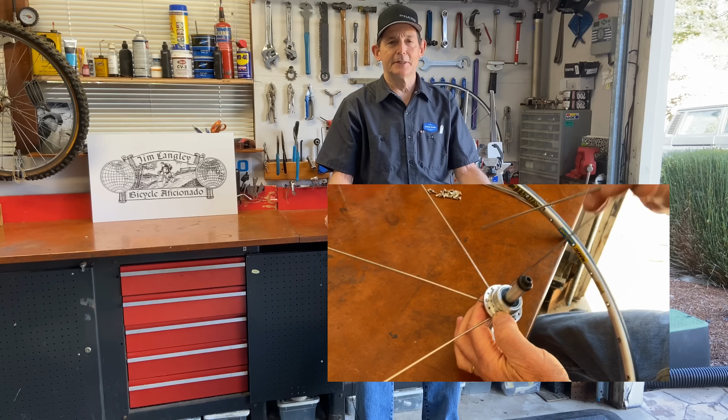One of the most satisfying things you can learn as a bicycle mechanic is how to build bicycle wheels. I've taught building bicycle wheels in bicycle shops, and I taught it at a university bicycle mechanics course, and I've learned that just about anybody can learn how to build a bicycle wheel. It's not that difficult if you have a little patience and you can follow a few basic steps. So I wanted to show you how it's done.

I think even if you're viewing this on a small screen like on a phone, you'll be able to see that I'm actually building this wheel with used components, used hub, used rim, used spokes. That's because I took apart an old wheel to get those parts. I did that because I've got a lot of these used parts on hand, and also because I think it's going to be easier for the camera to pick up silver on silver.

A lot of modern wheels, carbon wheels, you have black rim, black nipple, black spokes, black hub. Things tend to blend into each other and disappear, and you can't see it as well. And when you're lacing the wheel, you have to be paying attention to where you're putting the spokes because you're trying to put them in the right place. The pattern has to match for each set of spokes you put in. I think it's going to be easier to show you that on the video with the silver rim and silver parts. So I chose a used wheel, and that's what we're going to work with.

But speaking of used wheels, if you can get a used wheel, it's not too hard to find one. You can pick them up at Goodwill stores. Some bike shops might have wheels that they're throwing away that they would give you, or a friend might have an old wheel, or you can find them at flea markets and so on. But if you have a used wheel, you can use it to learn to build wheels. You can study the wheel as it is when you get it to learn the pattern and look at it,

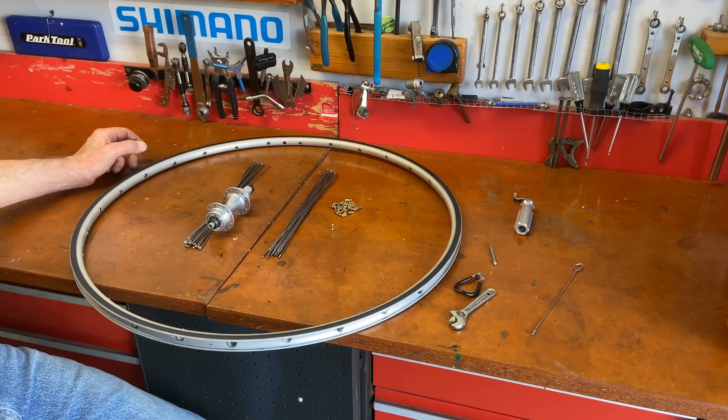To put the spokes in and build a bicycle wheel, you mostly use your hands and a few simple tools. You'll see that I'm going to use a little tool to feed the nipples in, but you could make your own tool out of a spare spoke. But mostly you use your hand. I also have a nipple driver which spins the nipple in, which is a cool tool by Bicycle Research. And Park Tool makes one.

But you'll also need the rim you want to use, the hub you want to use, and the spokes that fit the wheel you're building. You have to get the right length. Well, once you have the right length spokes, the hub, and the rim, you can put it together in about 15 minutes with a little practice. And I'm going to show you the process of what they call lacing, which is putting the spokes inside and turning these parts into a wheel.

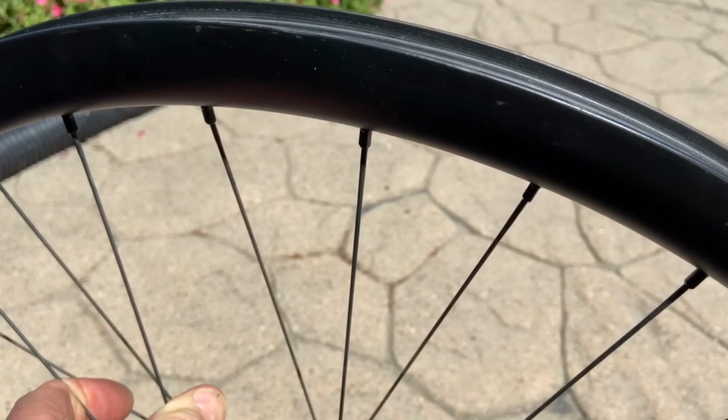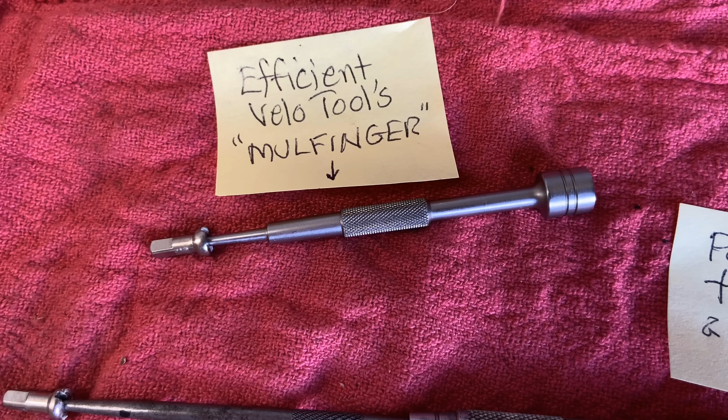If you're lacing a tall, hollow rim, it's pretty easy to make the mistake of dropping a nipple inside the rim, and then it can be hard to get out. You have to shake the wheel until the nipple falls out of the valve hole. To prevent this, you can use one of the tools shown. I use EVT's Mulfinger. You can see it at the top. But a scribe or awl or spoke works just fine for this too.

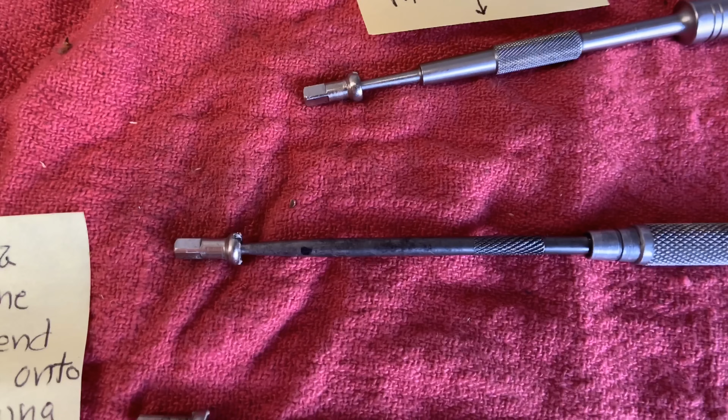Once you know how to build a wheel like this, you can build wheels for almost any bicycle. All right, we're almost ready to start lacing up the wheel, but I want to explain some very simple wheel building math. Nothing too complicated, but when you look at cross spoke wheels, you see all the spokes going every which way, it can be a little confusing to try to figure it out. But it's a simple pattern.

All bicycle wheels, this type of bicycle wheel that we're going to build, has 4 sets of spokes. It's going to be a 28 spoke wheel. So there's 4 sets of spokes. You divide by 4, you get 7 in each set of spokes. So what I've done here is I've started with 7 spokes in here just to show you. You can see individual spokes. It's not so complicated when you look at it like this.

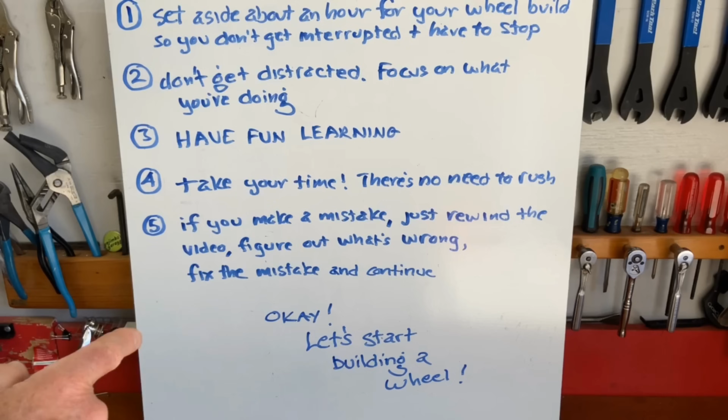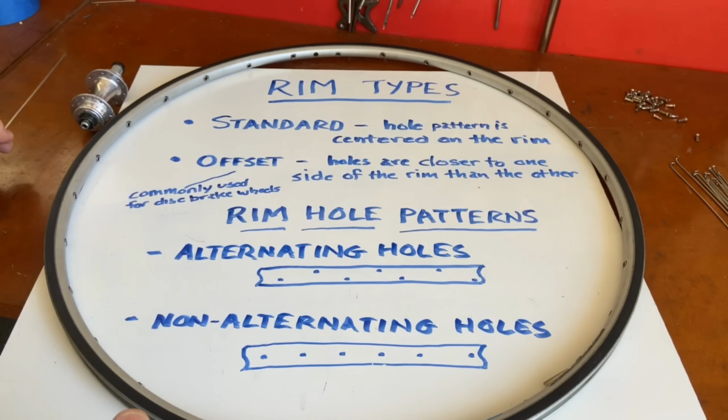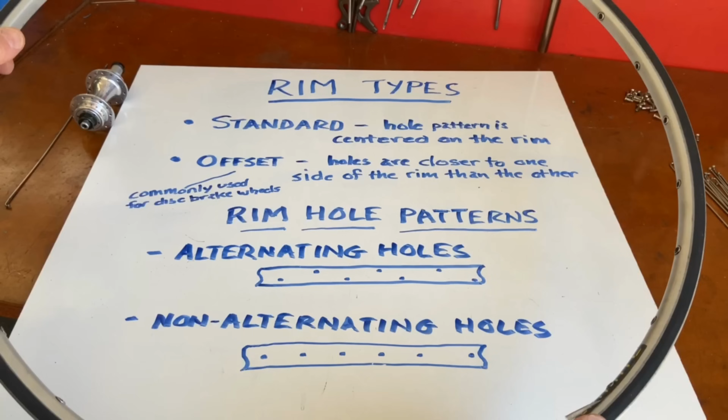The first step in building the bicycle wheel is putting 1 spoke in the hub and then putting that spoke in the rim. Now there's lots of different types of rims and I don't know what type of rim you're working with. If you're not sure what type rim you have, we're going to go over it here. I recommend going on the internet to the website of the rim company and looking for instructions, technical specifications on your rim, because it'll tell you what you have and how it's recommended to be spoked, to be laced up. And once you have the directions, it's easy to follow them. Follow the pattern that I'm going to show you here.

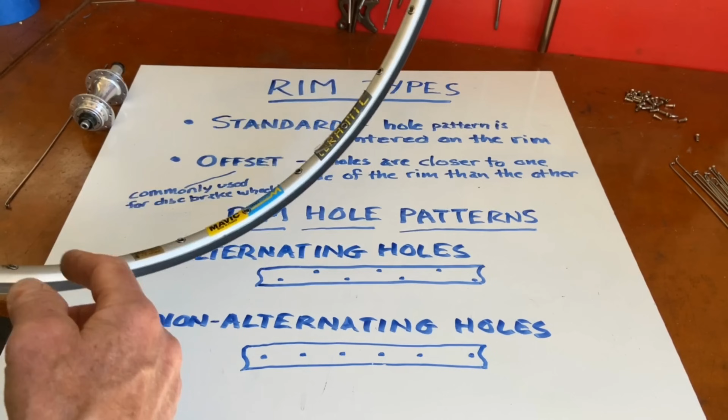Basically there's 2 rim types out there today. One is just a standard rim. By standard rim it means that the pattern of the holes in the rim runs around the center of the rim. That's one type, very common. The other type that's pretty common today because they're used on bikes with disc brakes is an offset rim type, and that basically means the spoke pattern is offset to one side of the rim. It offsets the holes to equalize the tension in the rim so you can build a stronger disc wheel. So those are the 2 types of rims that are out there. So if you have an offset rim, you start it a little different than if you have a standard rim.

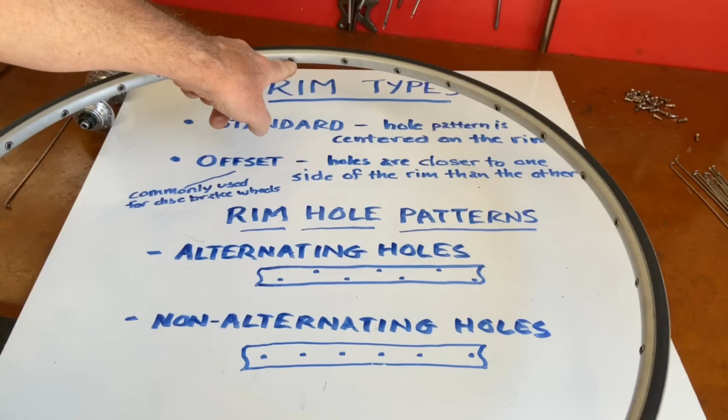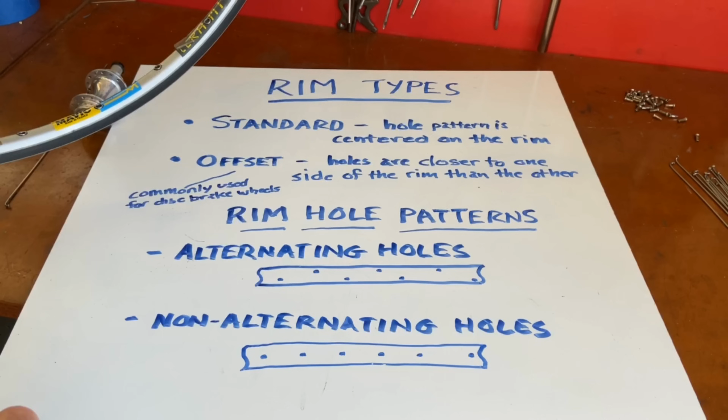The other thing is that there's basically 2 types of spoke hole patterns. The one we're working with is what's called an alternating pattern. One spoke hole is on one side of the rim, the other spoke hole is on the other side of the rim. There's also a non-alternating pattern, and on that one the holes run the same all the way around the rim. They don't stagger, one to one side, one to the other side. So figure out what you have before you start, and then you'll know where to put that first spoke. And I'll show you when we put the spoke in how I figured it out on this rim.

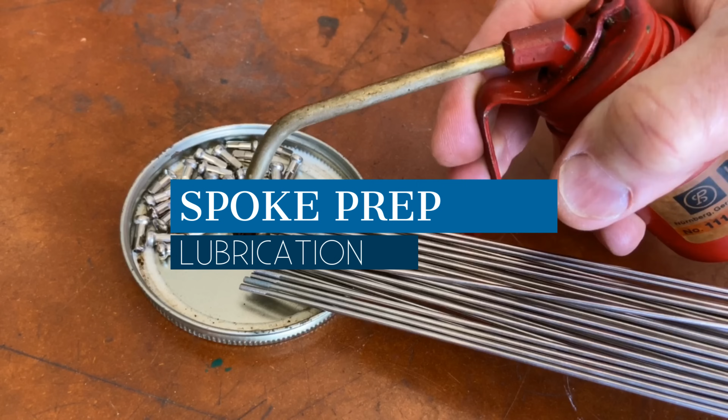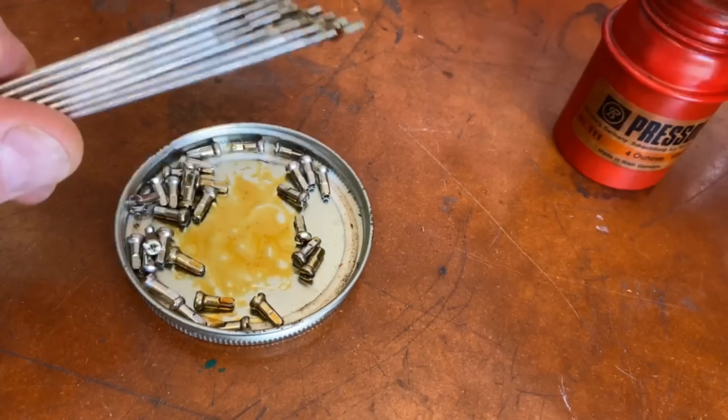To prepare the spokes for lacing the wheel, it's a good idea to put some oil, about the consistency of automobile motor oil, on the outside of the nipples and on the spoke threads. By doing this, you'll prevent the nipples from binding in the rim when you're truing the wheel and lacing the wheel, and you'll also make sure that when you tighten the spokes you can get them tight enough. Also, the lubrication on the spoke threads will allow you to true the wheel down the road and not have to deal with corrosion even 5 or 8 years after you built the wheel.

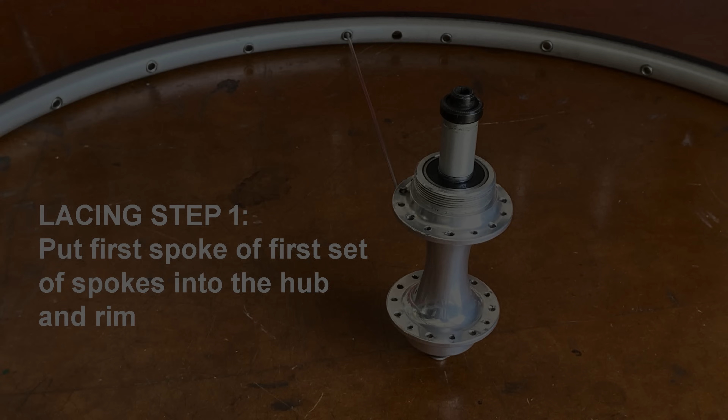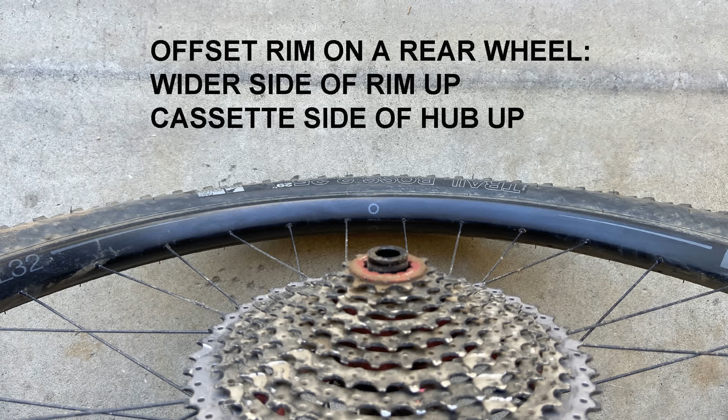The first step is placing the rim flat on a workbench with the valve hole opposite you. We're working with a standard rim with the alternating hole pattern. If you're working with offset rims, here's how they are oriented to begin lacing.

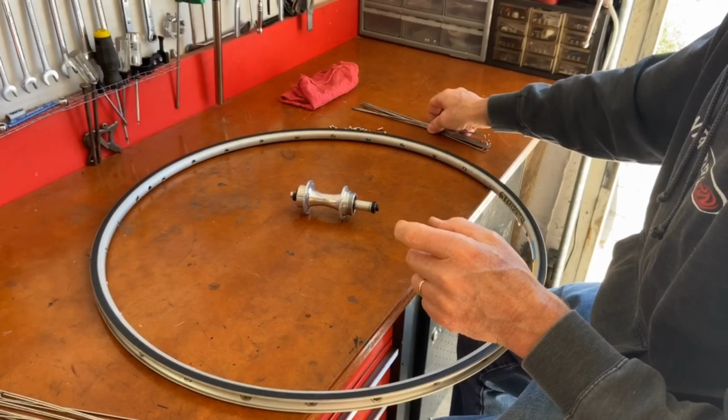Now begin lacing by inserting one of the correct length spokes into any hole in the rear hub's cassette drive side flange. You can put it in as shown, what's called head out, or the other way, which is called head in. Looking at the two rim holes on either side of the valve hole, determine which is offset toward the top. Push the spoke end into that hole and thread on a nipple. On rims with centered rim holes, the spoke can be placed on either hole next to the valve.

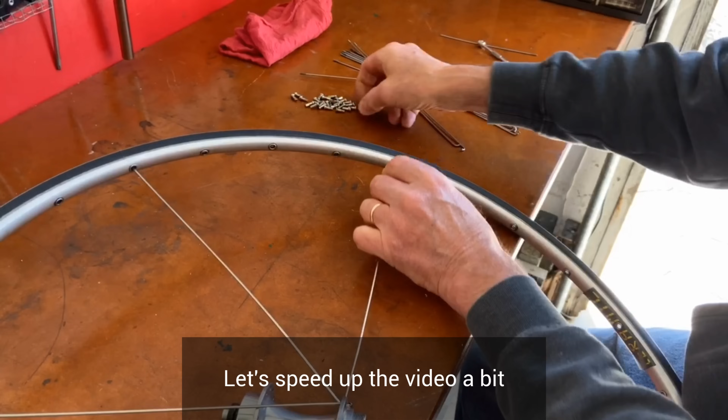In the same direction you installed the first spoke, place the rest of that set of spokes into the hub, using every other hole on that side of the hub. Now, one at a time, place these spokes into every fourth rim hole, counting from spoke to spoke, and add nipples. Try to turn the nipples onto the spokes about the same amount. Make sure none are barely tightened or else they'll fall off.

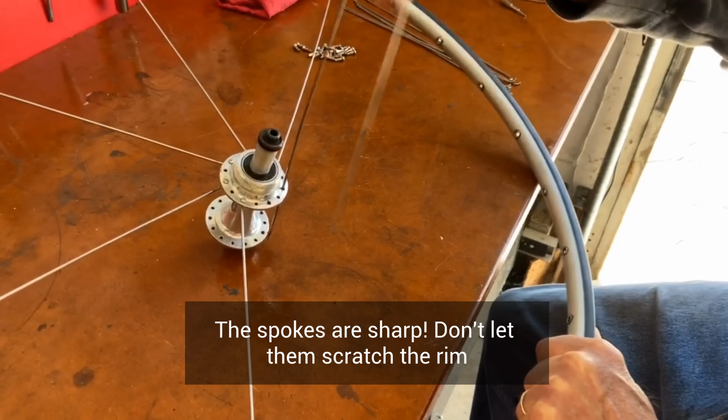When you're done, you should have a hub and rim joined by 7 spokes for 28 spoke wheels and 8 spokes if you're working on a 32 spoke wheel. You must have parallel spokes at the valve to provide clearance for pump heads. For this, you twist the hub to wind the spokes in the proper direction before adding the second set. Determine which way to twist them from the location of the spoke nearest the valve hole. If it's on the left, twist the hub to the left, counterclockwise. If it's on the right, twist to the right.

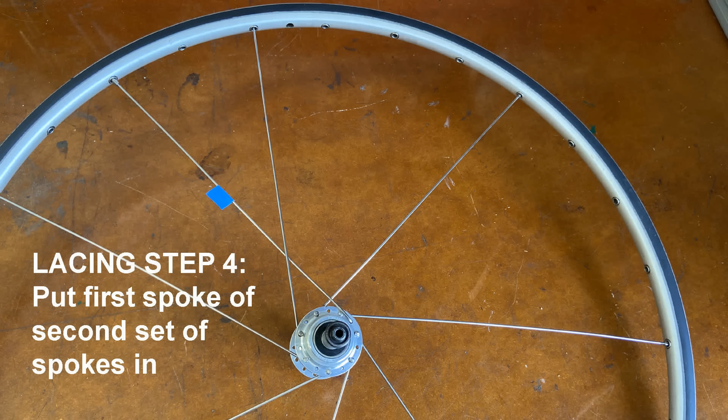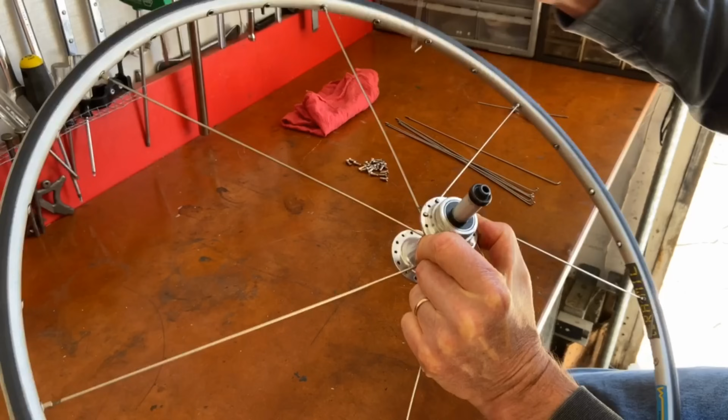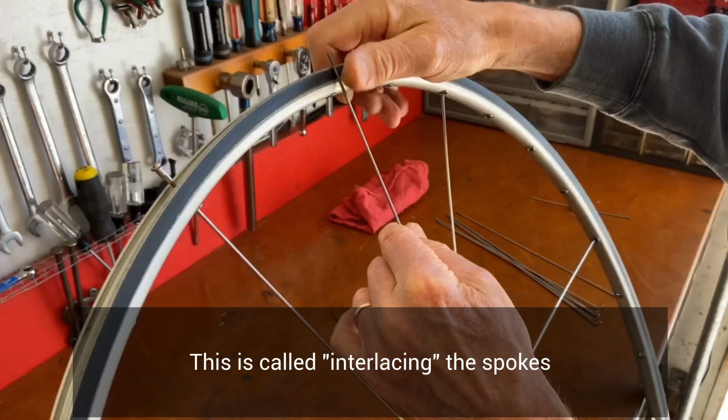Push the first spoke of the second set through any open hub hole right next to the other spokes, but push it in from the opposite direction. Keeping the hub twisted, lace the spoke over the first 2 spokes already in the rim and under the third. Then put it in the open rim hole that's centered between the 2 spokes on either side. If you haven't already, by this point you'll want to feed and turn the rest of the nipples from outside the rim with one of the tools I showed earlier.

Finish lacing the first side of the wheel by placing the remaining 6 spokes for 28 spoke wheels or 7 for 32 spoke wheels through the hub, interlacing them and adding nipples. Be sure not to actually tighten any nipples or else it can make lacing the rest of the wheel more difficult. Just thread them on enough that they can't fall off.

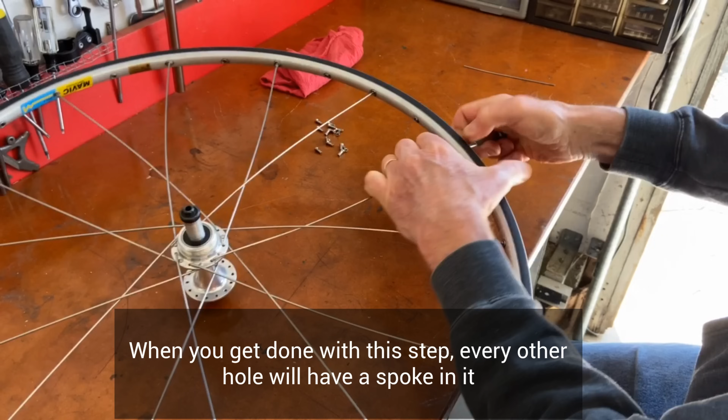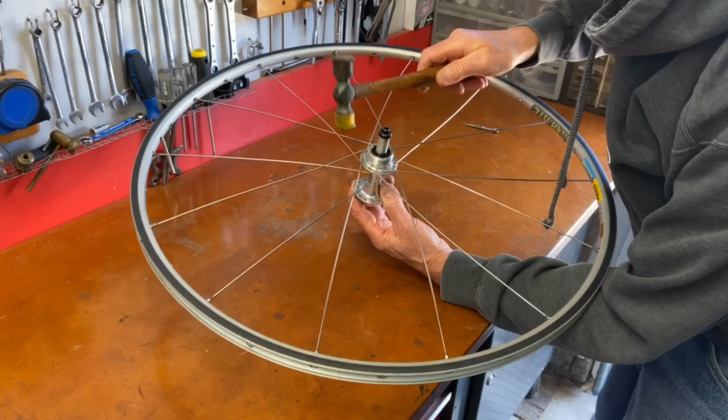New spokes can fit tightly in a new hub. They need to be seated or bedded in, or else they can have a bow in them that makes finishing the wheel much harder. You want them to lay flat. To seat the spokes in the hub, you can press down on the heads with the palm of your hand, or tap on them near the hub with a soft mallet to seat and flatten them.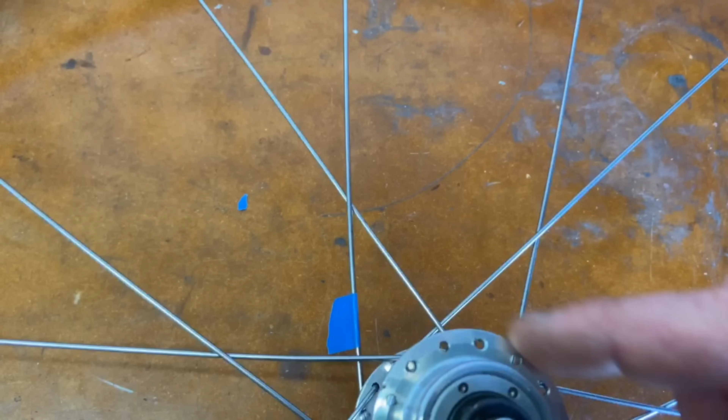The next spoke's position is trickiest to locate, and it's important to get it right. Here's my top trick to do that every time. Start by putting the wheel on the bench with the laced side down. Find the spoke that's in the second hole to the left of the valve hole. Down close to the hub, put a piece of tape on that spoke to mark it.

Looking through the open hub holes, you'll see that they are offset from the ones with spokes in them. The hole you want to put the spoke in is the one that is just ahead of the spoke you marked with tape. The spoke in the photo here is in the correct hole. Notice how its end is just ahead of the taped spoke. Now that you know what hole to put the spoke in, you can put it into the hub. Angle it slightly so it will fit through the spokes on the other side.

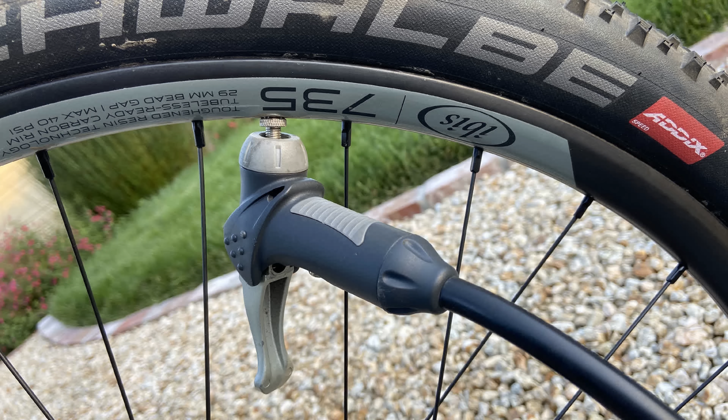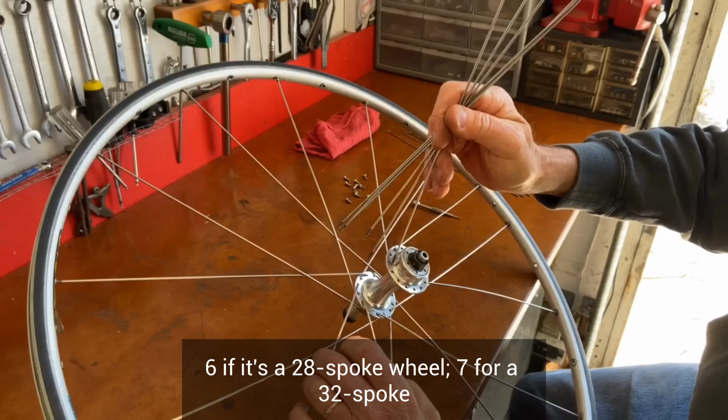Now pull the spoke up, put it in the rim hole to the left of the valve hole, and thread on a nipple. You now have parallel spokes at the valve stem. Add the next 6 or 7 spokes of the third set of spokes, filling every other hub hole.

Start with the spoke next to the first one you put in and place it into the 4th rim hole, counting from that first spoke. Screw on a nipple. Repeat this process until the whole third set is in place in the wheel.

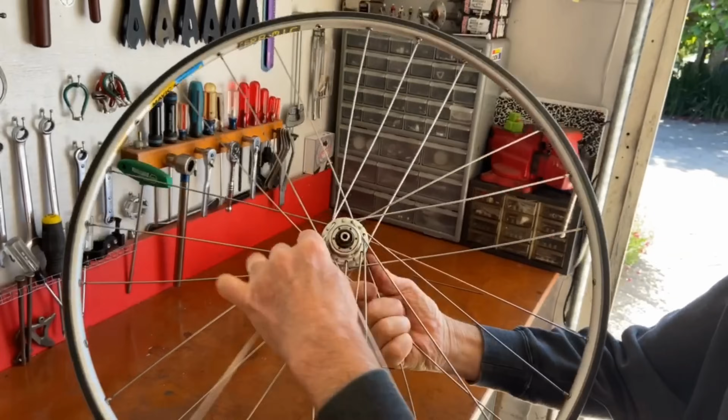Once they're in the hub, lace them to the remaining rim holes, being sure to interlace them, passing each one over two and under one spoke.

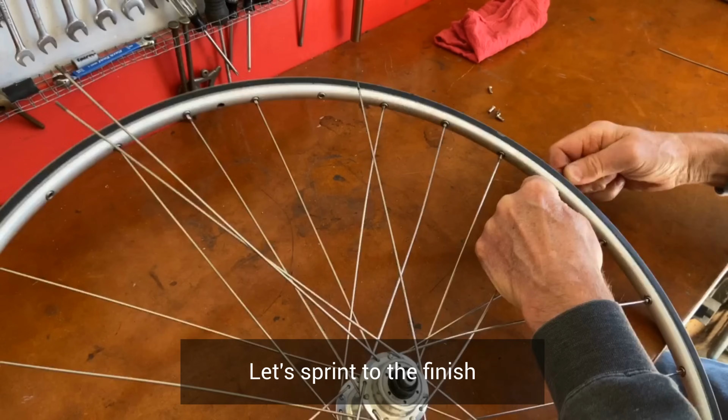As you lace the final few spokes, feel proud that you now possess the knowledge and skill to assemble one of the lightest, strongest, most beautiful, and most fun objects in the world. As a last step, give your work of art a final once-over and appreciate that you have parallel spokes at the valve stem and interlaced spokes.

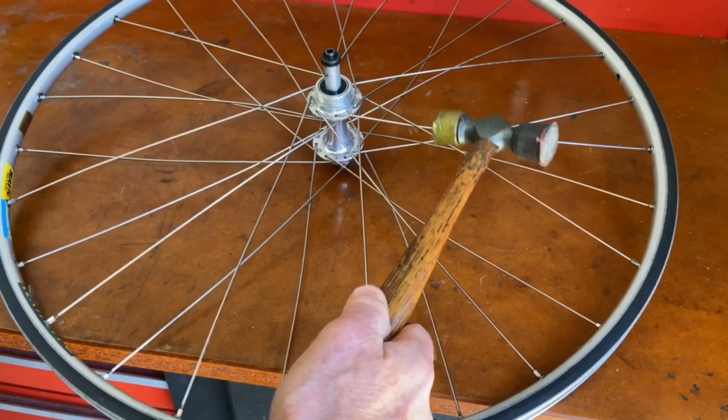Just like you did earlier, hit the final spokes to flatten them. That takes care of the spokes with the bend here, the head down spokes. But you want to also pull up the spokes with the heads up, which are on the inside. What you're trying to do is get all the bend out of the spokes, because you want the spokes to all be the same, which helps when you're truing and tensioning, and also takes any stress from being built left inside the spokes in the wheel, which affects it when you're truing and tensioning.

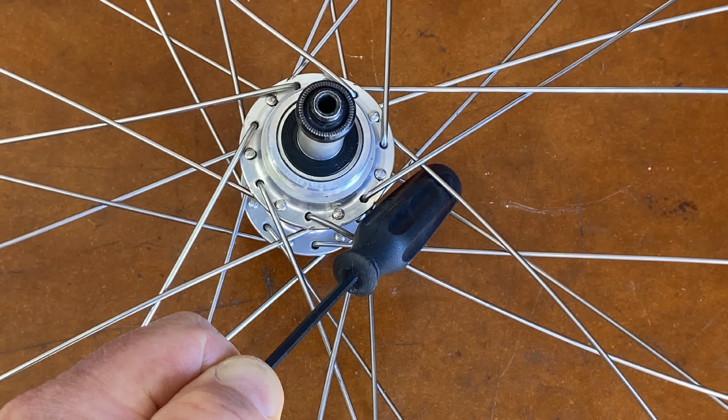Another trick you can use is you take a little screwdriver and you slip it underneath the heads up spoke, and that leaves it on top of the heads down spoke. And if you push down, you'll both pull up this spoke and flatten that spoke, seating the spoke bend and pulling the head of the spoke into the hub and bedding the spoke in.

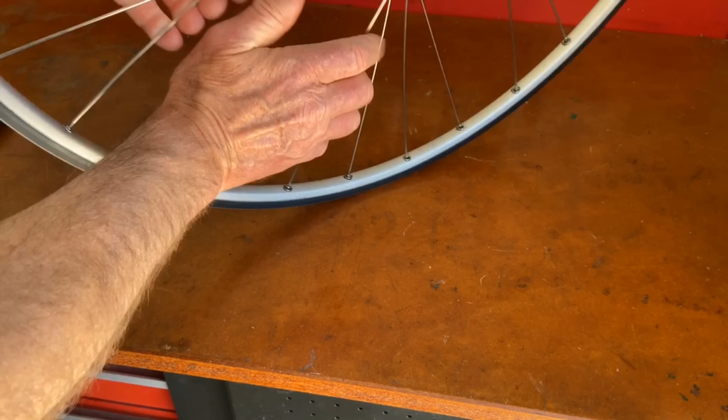Another good thing to do is to get the nipples seated in the rim, pulling them in. And to do that, you grab parallel pairs of spokes. So I'll grab this parallel pair here, I'll grab this parallel pair here, and I'll squeeze them towards each other. That pulls the nipple into the rim. It also helps seat the spokes. See how the spokes get bent a little bit? Those two processes will help make it easier to true and tension the wheel, because the spokes will all be the same length, or closer to the same length, because you've taken the bend out and seated them all.

When we started lacing, I said to turn the nipple onto the spoke about 4 turns. So if you were perfect, you could do that, but nobody's perfect. And what tends to happen is, as you can see, you get some that are threaded down further than others. So the first step in truing and tensioning the wheel and rounding the wheel is to set all the nipples at the same height on the spoke, because the nipples are what are holding on to the rim. And if you get the nipples all at about the same height, you're going to start with the wheel a little rounder and a little truer than if you start with them all at a different height.

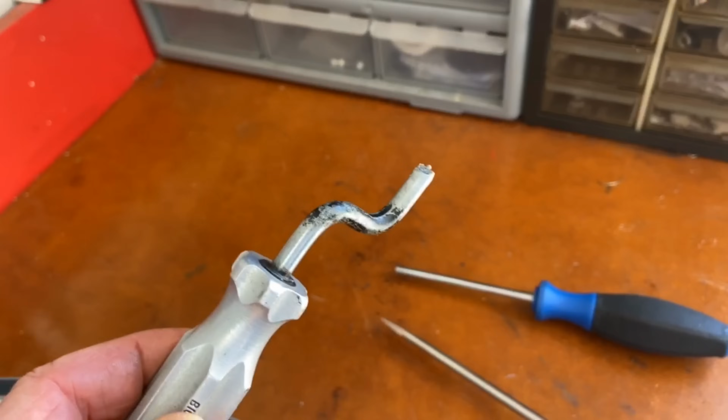So to do that is pretty easy if you have some basic tools. You can either use a screwdriver. These are slotted nipples, and with slotted nipples you can use a screwdriver which fits in the slot. Or if you have one, like I mentioned before, you can use a nipple driver, which is a little tool that lets you spin the spoke in more quickly. I'll show you how that works. You just place it in the slot in the nipple. You spin the tool and you watch.

And with each nipple, let's say you decide that you want to go down, I would go down to maybe expose 2 millimeters and stop there. You can do the same with a screwdriver. All this does is make it a little faster. Now there are some nipples that aren't slotted but have a square head on the inside.

These tools won't work for that, but if you use something like Park's square drive nipple screwdriver, it has a square end that fits on the square drive nipples, and you can do the same thing with this.

Well, I hope you liked lacing the wheel. It's a fun process, and as much as lacing is fun, I think you'll find truing and finishing the wheel, tensioning the spokes, and getting it ready to ride equally fun, if not more fun. But you want to check your wheel one more time before you start truing and tensioning.

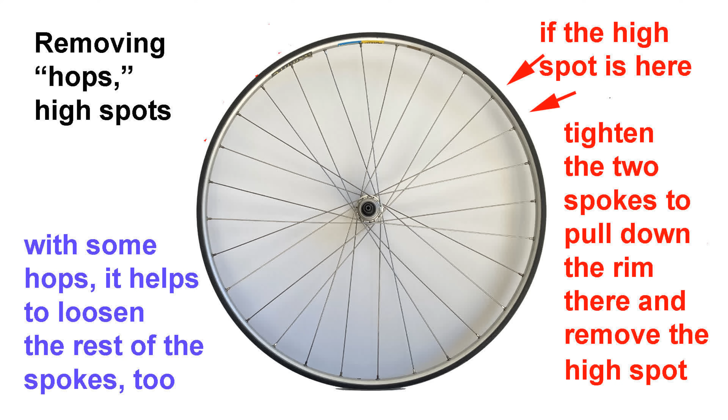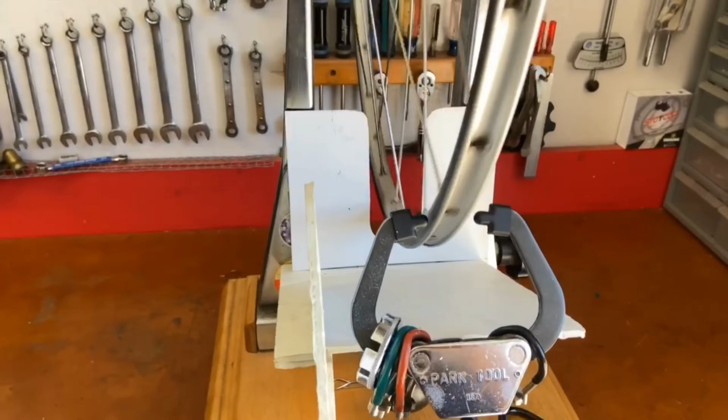I'm going to true our just-built wheel in a truing stand, because a truing stand has these nice indicators down here on either side of the rim, and I can come down here and get real close, and you should be able to see what I'm working on with the spokes and the indicators and see the changes in the side to side and the up and down of the rim as we true.

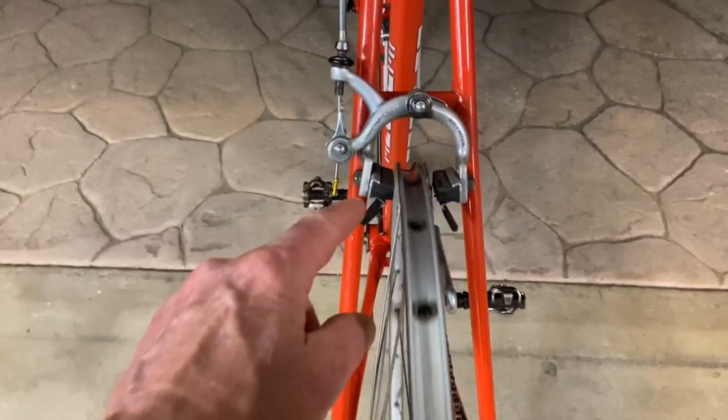But if you don't have a truing stand, you could also put the wheel in the frame of the bicycle you're actually building the wheel for. You can see what I've done here is pretty simple. I just put the seat on the edge of the garage door, which lifts the rear wheel off the ground and holds it there. And then I can sit here and spin the wheel and make adjustments. Use the frame of the bicycle. It works just like a truing stand. I can use the brake blocks as indicators to watch side to side and up and down in the rim and make adjustments with the spokes.

And one of the advantages here is that when you're working on a wheel in the bike frame, you can center it to the frame. You don't need special tools. You'll see when I show you truing in the wheel truing stand that there's a special tool called a dishing gauge I use, and there's another way to do it if you don't have a dishing gauge. But if you work in the frame, you can center it to the frame of your bike as you're truing and rounding the wheel, which is a nice way to do it.

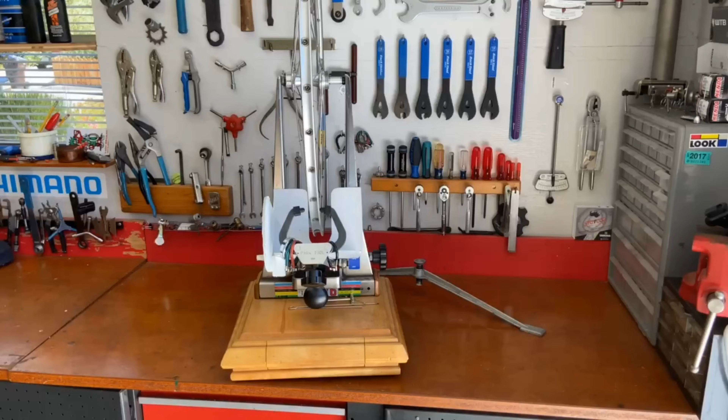If you don't have a garage door, you could put the bike in a trainer. That's another way to get the rear wheel off the ground. And for the front wheel, of course, you could just raise the bike higher up to get the front wheel off the ground if you're building a front wheel. So I've got the wheel in the truing stand. I'm going to come in tight with the camera so that you can see what we're doing.

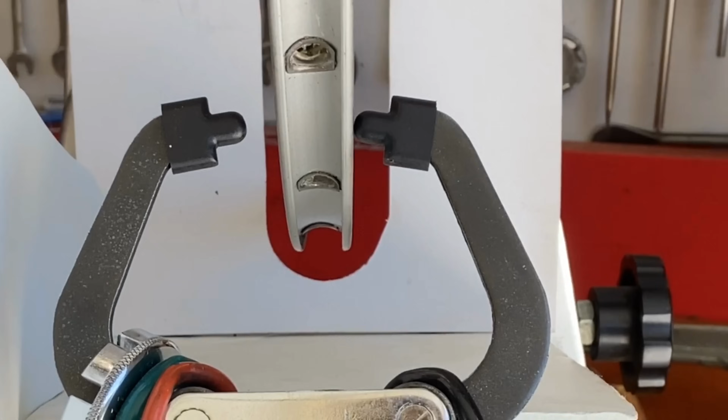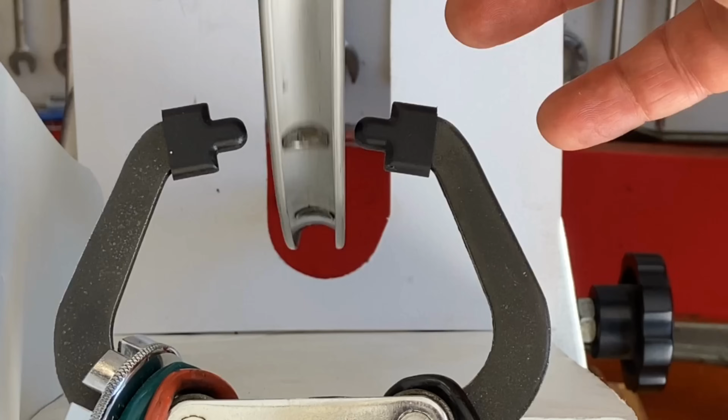First, we'll start with the side-to-side truing. For that, you use these two indicators and you position them up and down until you have them right next to the rim. Now when you spin the wheel, you can see the wobbles in the wheel. Remember, this is a brand new wheel. Spokes are kind of loose, well, very loose still. And we don't expect it to be perfect after we just laced it up. So right now I'm going to work on fixing the side-to-side wobble. You can see that it's coming over and hitting the right indicator. So if I want to move it away from that indicator, you loosen the spokes on the right-hand side and you tighten the spokes on the left-hand side.

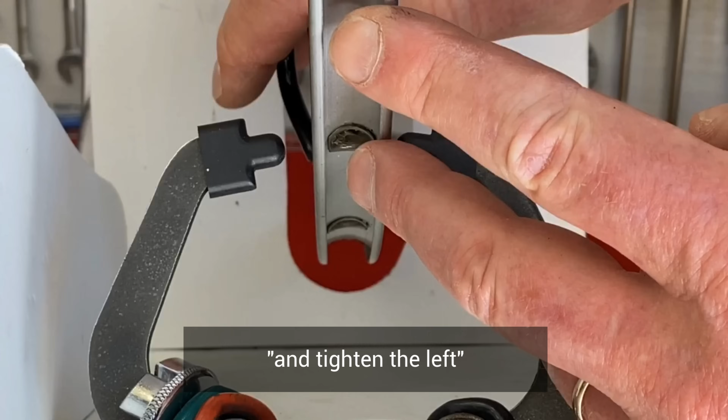So we'll start with this first wobble. There aren't very many wobbles in this rim, so we'll start with the first one. Go back here. There it's rubbing. Now if I loosen this spoke, which is on this side of the hub, tighten the nipple half a turn at a time, and I give it a spin, that slight adjustment right there completely fixed the problem. So now we'll bring the caliper a little closer and we find the next wobble.

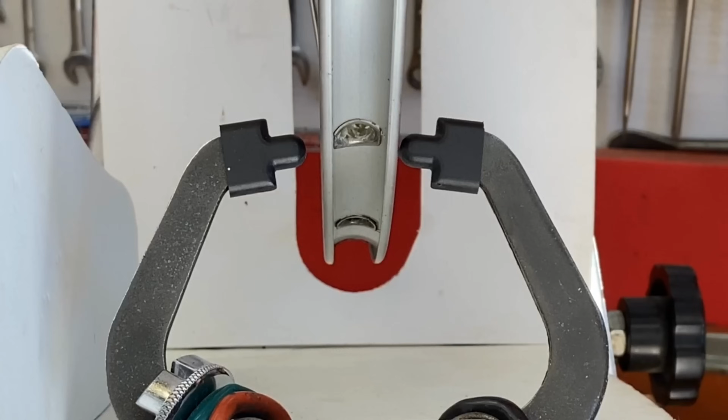If the wheel was perfectly centered in this truing stand, it would be right between the two indicators. So I know that because it's rubbing here, it needs to move this way a little bit. So again, I'm going to loosen the spokes on this side of the rim, and I'm going to tighten the spoke on the other side. I actually loosened two on this side, I tightened one on this side. Let's see what effect it had. Much better. So now we can bring the indicator in. See how it's getting smaller and smaller?

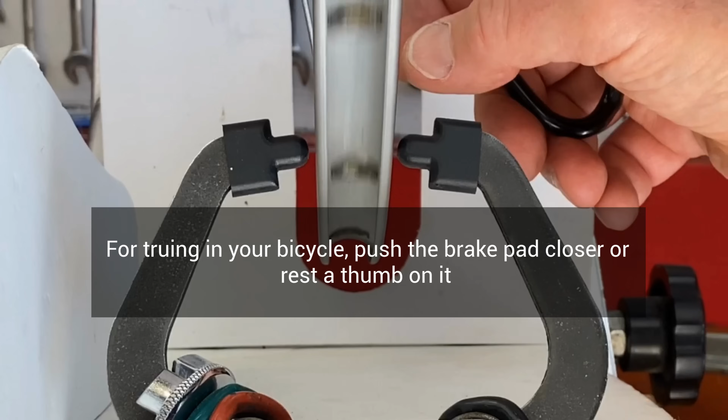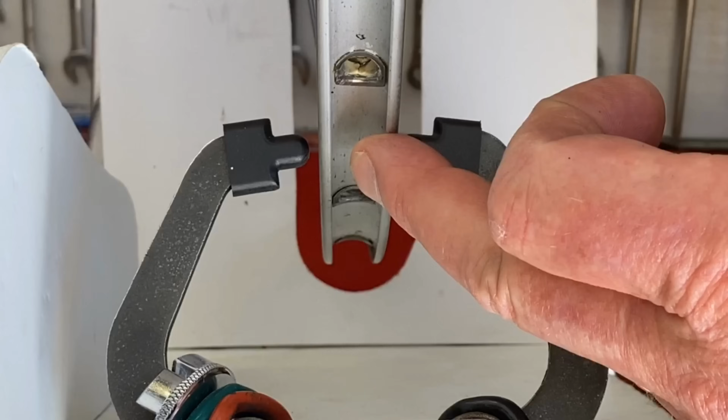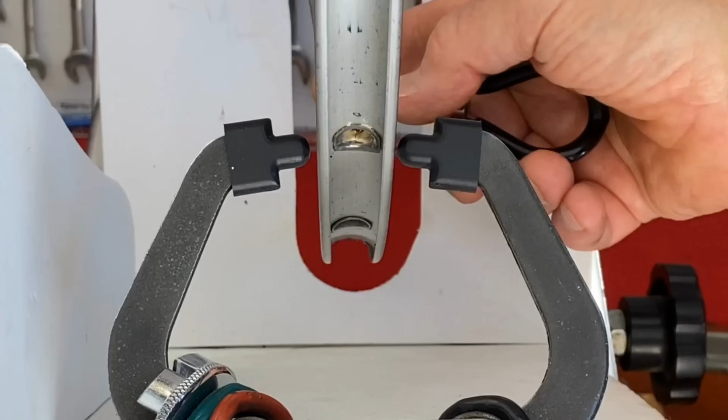Now we're going to tighten these spokes on the left side a little bit in half-turn increments. Loosen this side a little bit. Look again. As you make adjustments and change it in one spot, it's common for the wobble to move. So sometimes you have to chase it around the rim a little bit. So again, I'm loosening spokes on the right, tightening spokes on the left over the section of the wobble. You can see that it's what I said, a trial and error process. You go little by little, use your indicator, and keep improving it.

As it gets closer to straight, you often have to make a lot of little adjustments where you're moving a lot of little wobbles. As it gets closer to perfect, it can seem like it's harder to true. But it's not really harder, it's just that you have to look more closely to see the wobbles and make slighter adjustments, go more gradually.

Now we've got it almost centered, because we tightened those other spokes, made the adjustments that we made, we knocked it out the other way. So we go to that section, and now we're going to loosen the spoke on the left, tighten the spoke on the right. Two spokes. See how we did. It's getting better.

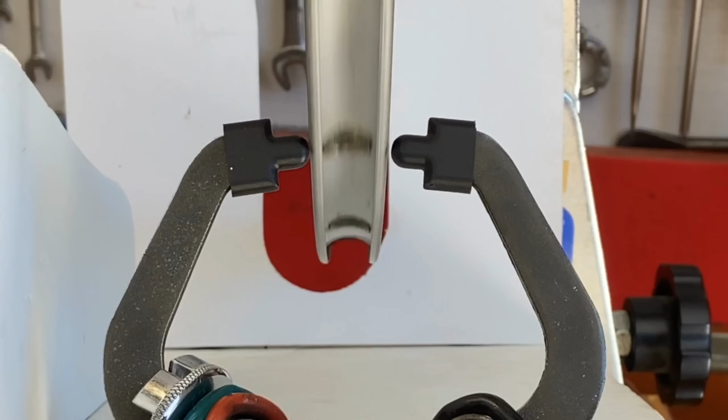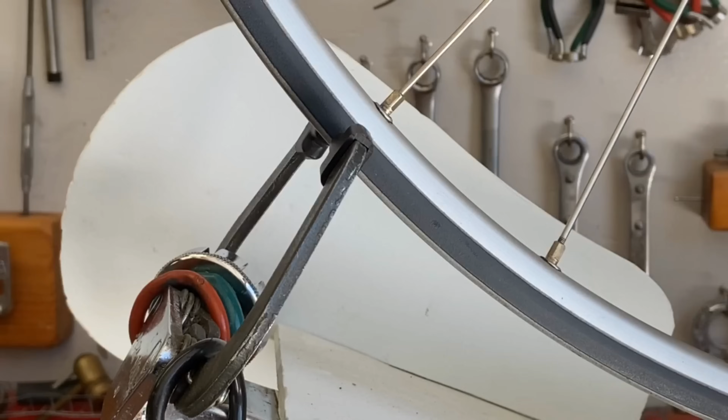When you have it side to side pretty close, and you're pretty happy with how it is, then it's time to check up and down, because the two influence each other. To true for roundness, to adjust the vertical on the wheel, you move the indicators, the calipers, down below the rim, because we're going to sight the gap between the bottom of the rim and the tip of the indicator, the calipers here. So if we bring them together like this and look at this gap right here, and we give the wheel a spin,

you should be able to see that it's got a hop, a high spot. As I bring the caliper in, it becomes more apparent. See how it hits on every revolution? So the wheel actually is not round. It has a high spot in it. So our job is to remove that high spot. To do that, we find it, we stop it at the caliper where it's hitting, and then we tighten the spokes in this area, which pulls that part of the rim up.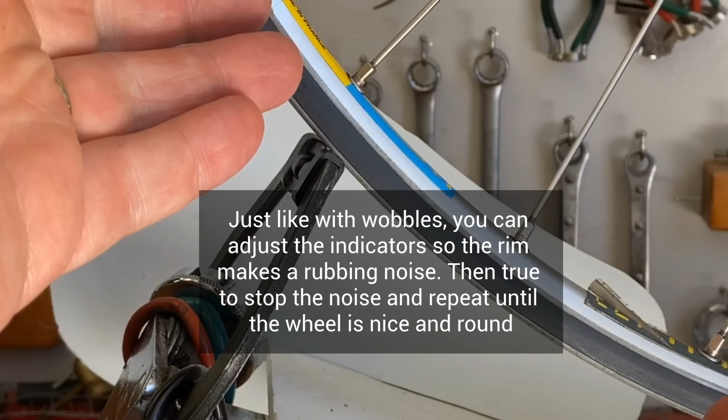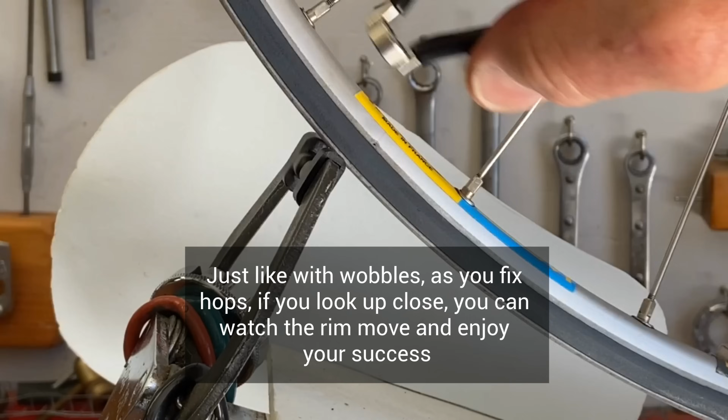It's hitting right here, so let's try half a turn, half a turn, half a turn, give it a spin. Already it's a little better, so let's get it back to hitting. There, it's still hitting. Another half a turn tighter, half a turn tighter, half a turn tighter.

Now, if you didn't have a truing stand and you're working in your bike frame, like I showed, you'll have a brake caliper on either side of the rim, and you can actually put a pencil across the brake blocks and create this line that you sight to for finding hop.

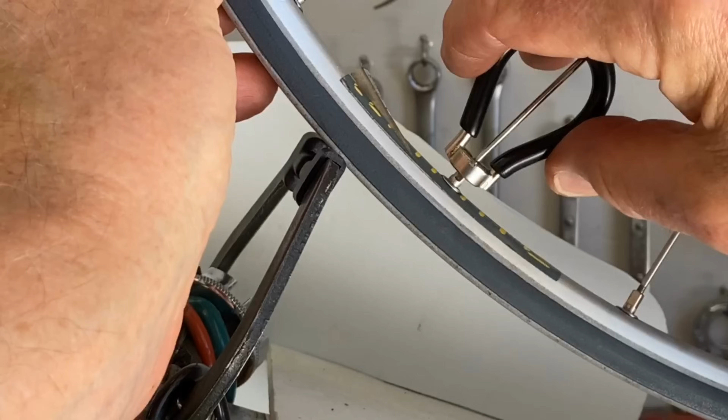It's getting a little better each time. It's still rubbing a little bit. It moved a little bit. It was over here, and now it's moved over here. Half a turn, quarter turn maybe, half a turn. Let's try it again. Remember I said you chase it around? But we're getting closer with each little adjustment. We just take our time.

Notice that all I've done is tighten spokes. You don't have to worry about left and right spokes. You're tightening each spoke.

Another situation you can run into when you're rounding a wheel is you can have a dip in the wheel. You see how the wheel comes around and there's actually a low spot in the wheel. Usually you're working with the high spots, because with a new wheel just being laced up, the spokes are all relatively loose. But sometimes there might be a bad part of the rim that's a little low. Like on this rim, you can see that low spot that's coming around.

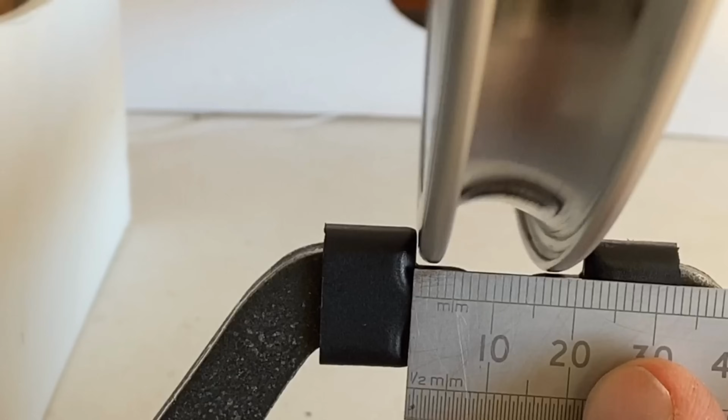Get to this point, you go back and work on side to side again, and then you continue. You come back, you work on round again, and you keep going until you're really happy with both. Side to side is where you like it, and roundness is where you like it.

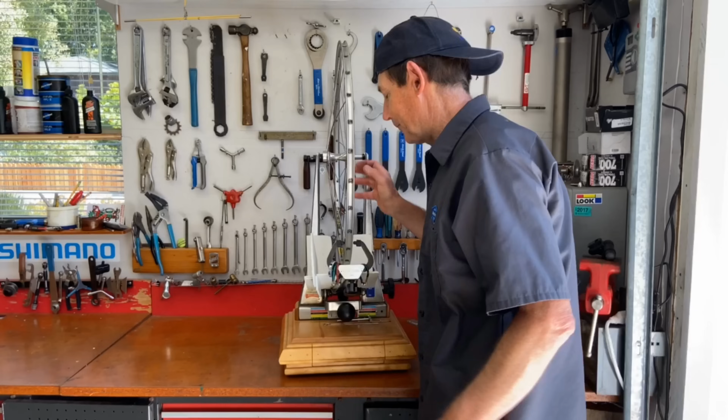When you're satisfied with how true you've got it side to side and up and down, and you're pretty happy, you want to check centering. The centering of the rim over the hub. That makes sure that when you put the wheel in the frame, it'll be centered in the frame and not off to one side or the other.

Some truing stands, like this Park truing stand, automatically show me where center is, so I just true to the indicators, the caliper on the truing stand. If you have a truing stand that doesn't do that, a trick is to simply flip the wheel in the truing stand and just check one side.

You look at the caliper, the indicator next to the rim, and if there's the same distance between the tip of the indicator and the rim, whether it's put in this way or this way, then you know that the rim is centered. That's a quick way to do it.

There are also tools called dishing gauges, which is a tool that provides 3 points. There's a point in the center, and each end is a foot. So you put this tool on the rim and you adjust the center foot. See how I've adjusted it? And now the two ends are not touching.

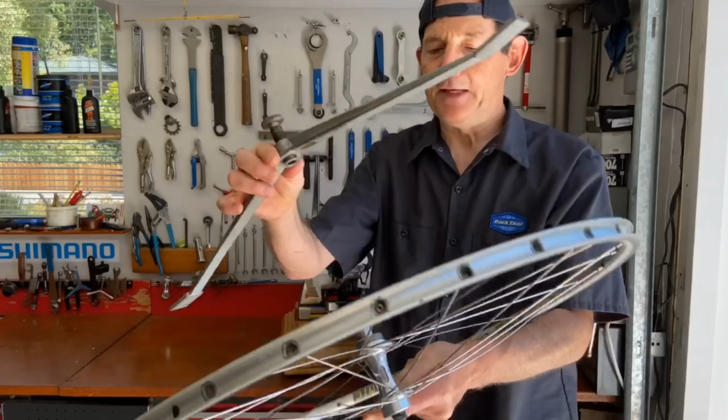And you adjust it so that all 3 points touch on this side. And if the wheel is perfectly centered, all 3 points will touch on this side and this side. If you have a situation where there's a big gap on one side and it's touching on the other side, it tells you that the rim needs to move halfway in between.

So a dishing tool is a nice way to go, but you don't need it. If you have a truing stand, you can flip the wheel around, and if you're working in the frame of your bicycle, you can go by the stays, the tubes on the bicycle, and center it between them, and that'll work fine too.

You want to check centering after each step, and you definitely want to check when you think you're all done with the wheel as one final last step, because you don't want to end up with a wheel that's too close to one side of the frame or the other.

When you check for centering, if you find that the wheel is off center, out of position, not right in the middle, then what you need to do is move the rim in the direction it needs to go. You do that by working on only one side of the spokes.

So you go to the valve stem hole, start there so you know where you started, and then if you wanted to move the rim this direction, go around and turn all these nipples, every nipple on the right side, the same distance. A quarter turn if you want to move it a tiny bit, half turn if you want to move it a little more. Then you check the centering and keep doing that until you get the rim right where you want it.

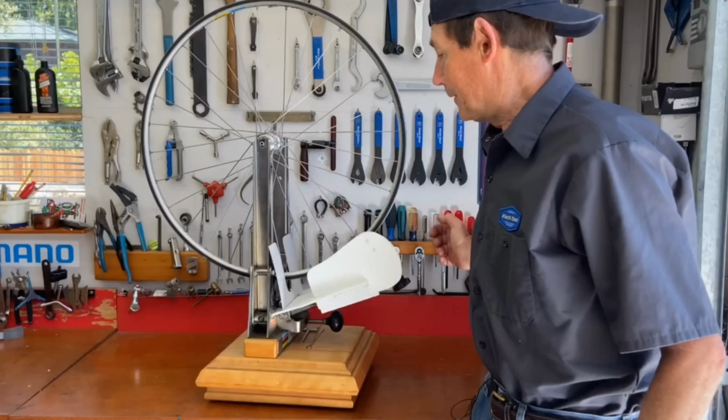To do that, you just use your hands. I spin the rim around until the valve stem hole is in front of me, and then put my left hand on the parallel spokes, my right hand on the parallel spokes on the right, and then I squeeze with authority. Might not look like I'm squeezing very hard, but I am actually pulling pretty hard on the spokes trying to seat them, and if they're not seated correctly, the pressure will pull them into place. And if any of the spokes are wound or the nipples are wound, it will help them

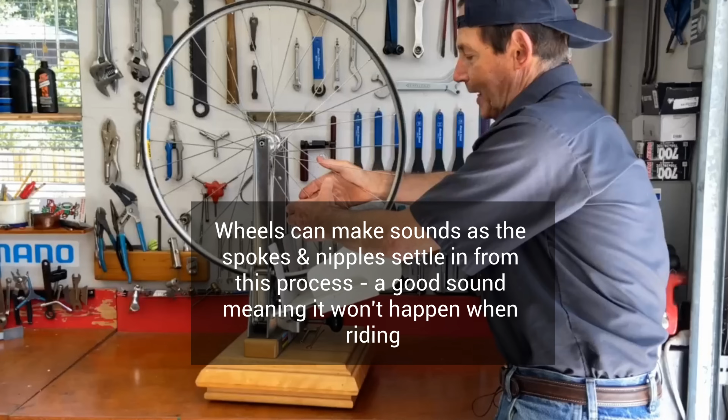relax. I go around the rim squeezing parallel pairs of spokes until I'm back at the valve stem hole. And I'll do that maybe 3 times in the course of a wheel build. Definitely at the end, just to make sure that all the stress is out of the wheel.

The final step of your wheel build is tensioning the wheel. I've spoken about this a couple of times and how important it is to get the spokes uniformly tight so that the wheel holds up when you're out riding it. To tension the wheel at this point, just to go over what we've accomplished, the wheel is as true as we can get it side to side, it's as round as we can get it up and down, and it's centered. Now what we're going to do is uniformly tighten the spokes little by little and not lose the true or the up and down, and keep it on center too.

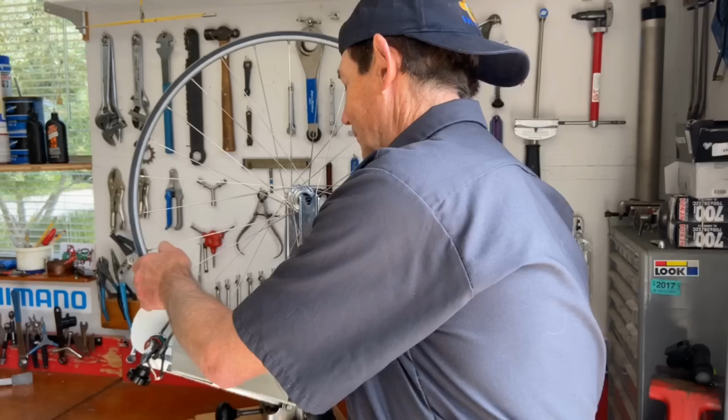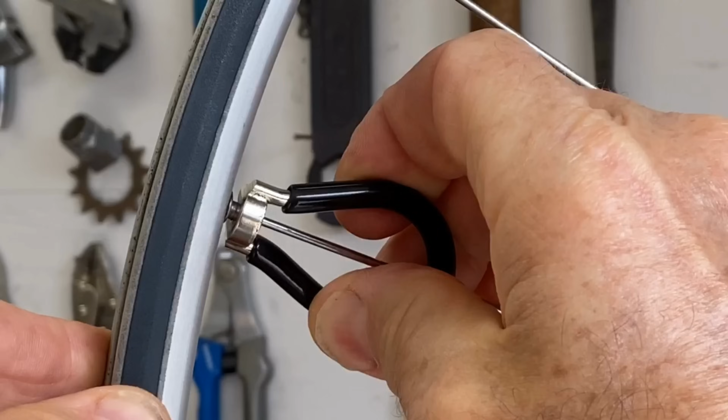To do that is sort of a precision process. It's not difficult, but you want to pay attention to what you're doing. And what you do is you start at the valve stem hole again, and you go around the rim, turning each nipple 1/2 turn at a time, just a 1/2 turn at a time. You go around the wheel doing that. You do it once, and then you check. You see if it came out of true, you see if it came out of round, and you make sure it's still centered. If anything changed, fine tune it.

Stress relieve gently on the spokes, then go around, start back at the valve stem, 1/2 turn at a time, all the way around again. You'll have to do this approximately 6 to 8 times, depending on how tight your spokes were when you finished truing and rounding and centering the wheel. Sometimes it'll be fairly tight, but when you get done with the tensioning, the spokes should be very tight.

Now, if you're not sure how tight is right, go to another bicycle you have of the same type that the wheel you're building has on it, and then squeeze the spokes on that with your hands, like when you stress relieve the wheel you're building. Feel the spokes on the wheel you have and compare it to the wheel that you're building. And you can get a feel for it. You can also pluck the spokes and listen to the tone that they make, and then compare.

The tight wheel on a bike that's riding well and the wheels are good, your wheel wants to be as tight as those spokes. So this takes a little practice and a little experience, but you can get it high enough tension to ride it no problem. And remember, if the wheel is going out of true when you're actually riding your new wheel, you just get it tighter again.

Well, if you made it all the way to the end of this video, good job. Hopefully you now have the skills and the knowledge to take a crack at building wheels. And maybe you'll end up becoming a wheel building fool like yours truly. It's a lot of fun. It's very satisfying. And when you can build your own wheels, if you do decide to go on a long trip on a bicycle, a broken wheel or a bent rim won't slow you down. You'll just get the parts you need and you can fix it on the road, or you can help your friend if you have a friend with a bike. So it's a great skill to have.